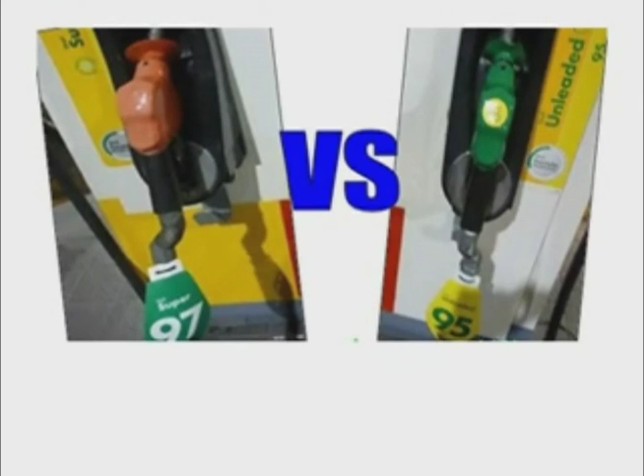In this video, we will discuss a common question that confuses a lot of consumers: octane number. When we go to the gas station, we typically find two different grades of fuel: RON 95 and RON 97.

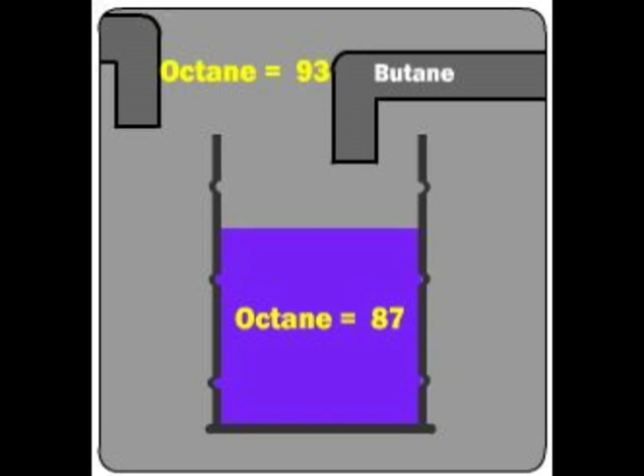RON stands for research octane number, used to measure the octane rating of a fuel. Those two different grades have different octane numbers. But the problem arises: what is octane number?

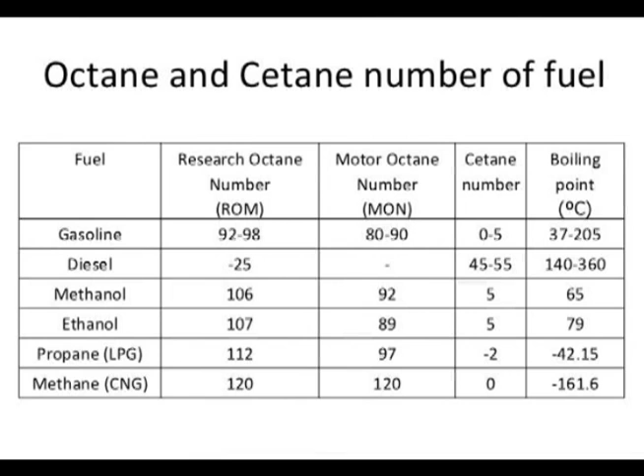The dictionary defines octane as a gasoline rating that indicates how much the fuel can be compressed before it spontaneously ignites. It is not an energy density rating, meaning a higher octane fuel will not make the fuel last longer than the minimum octane rated for your engine.

Many people think that using fuels with a higher octane number will give better engine performance. Actually, that is just not true.

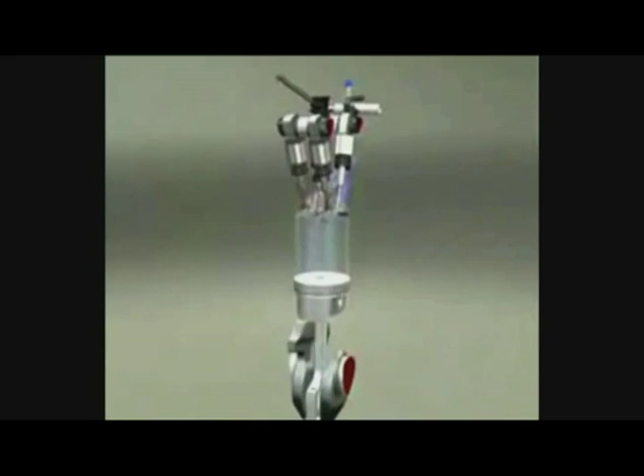Here is the engine combustion chamber of our cars. The internal combustion engine in all of our cars has a piston and cylinder. The piston moves up the cylinder and compresses the gasoline and air, which is then ignited by a spark plug.

If the gas ignites due to compression rather than by the spark plug, this causes a condition known as knocking. Knocking can damage an engine, so it is not something you want to have happening.

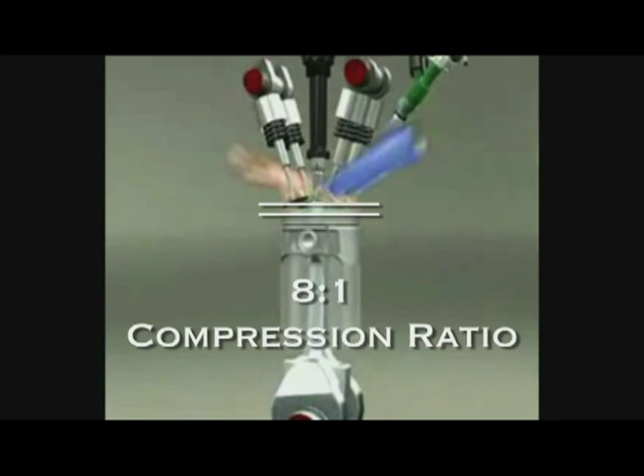The compression ratio of an engine is the amount of compression the piston makes each cycle. This determines the minimum octane rating the engine requires. One way to increase the horsepower of an engine of a given displacement is to increase its compression ratio.

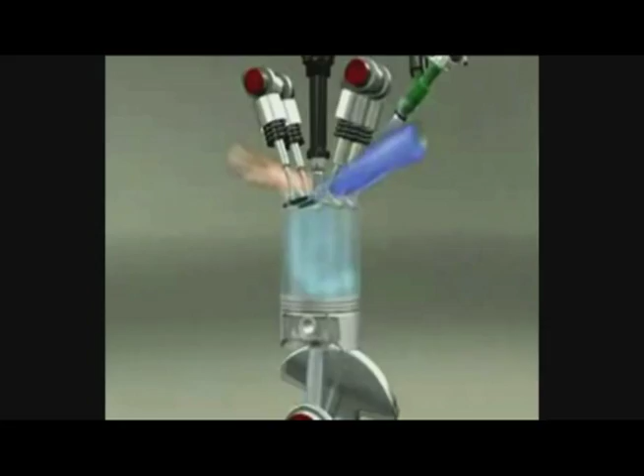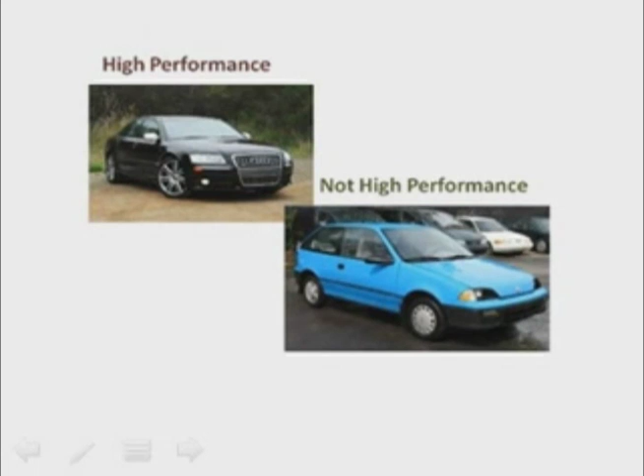So a high-performance engine, such as Audi, Volvo, etc., will have a higher compression ratio and require a higher octane fuel. The advantage of a high compression ratio is that it gives your engine a higher horsepower rating for a given engine weight, making the engine high performance. The disadvantage is that the gasoline for your engine costs more.

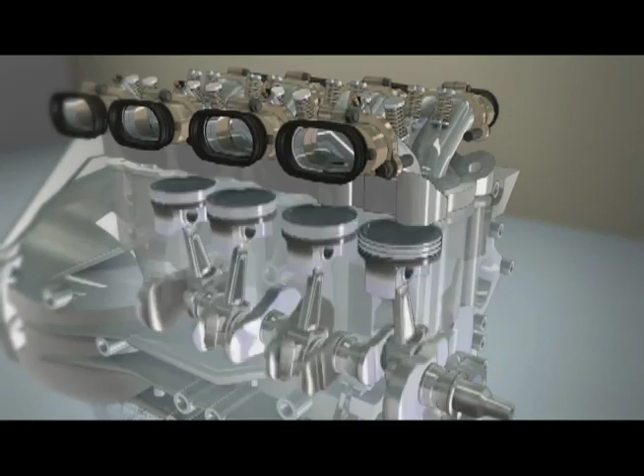How do gasoline additives make your engine work better? Let's tour a common vehicle engine to understand the role and importance of fuel additives. As quality gasoline enters the fuel tank, additives are already at work providing corrosion resistance and fuel stability needed by today's cars.

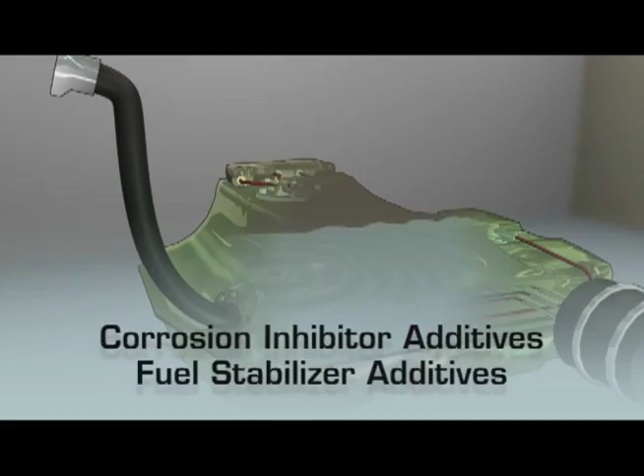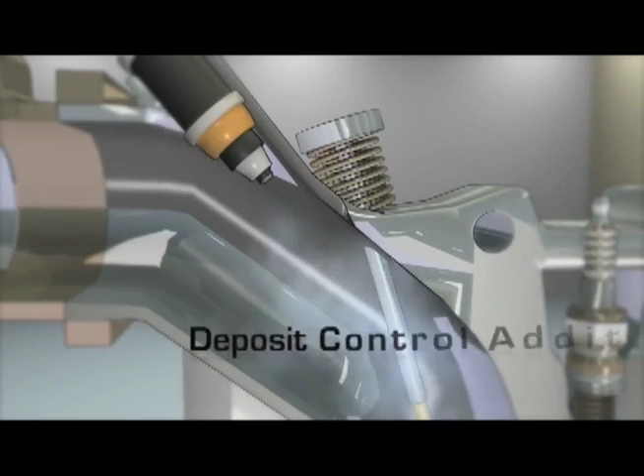Gas is then delivered to the engine through complex fuel injectors, which often sit just outside the combustion chamber. The fuel injectors must create a very fine mist of gasoline to vaporize effectively in preparation for combustion. Deposit control additives are critical to maintain ideal fuel spray patterns for effective combustion.

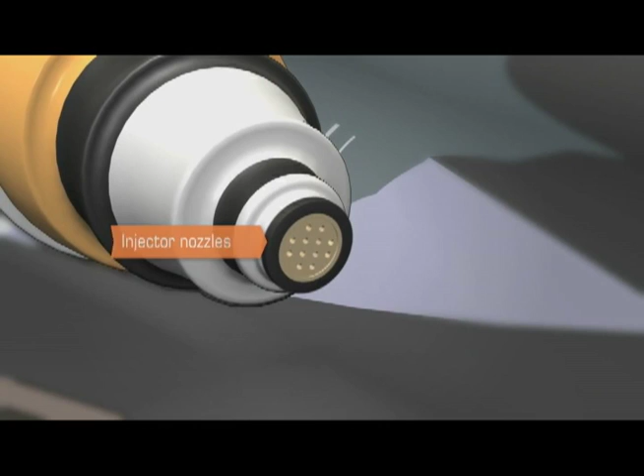These additives keep the injector nozzles and surfaces free of deposits. Without them, injectors can easily clog and result in inefficient fuel delivery.

During the engine's intake stroke, the intake valve opens and a mixture of gasoline vapor and air is drawn into the combustion chamber. During the compression stroke, the intake valve closes and the piston compresses the fuel.

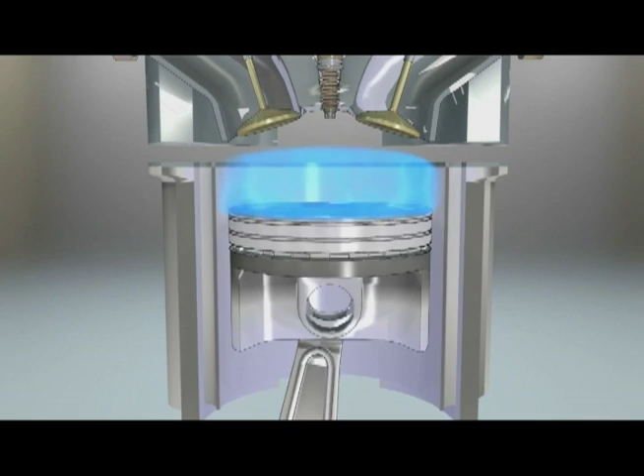As the piston approaches the top of the cylinder, the spark plug emits a spark and ignites the fuel, forcing the piston back down through its power stroke.

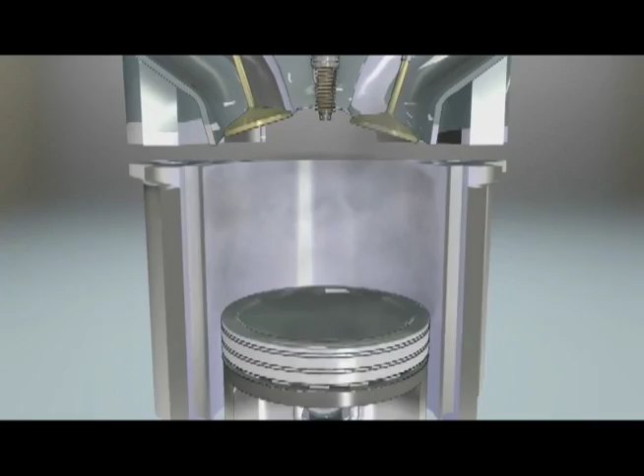Finally, when the piston hits the bottom of its cycle, it starts back up through its exhaust stroke. The exhaust valve opens and the exhaust gases head towards the tailpipe.

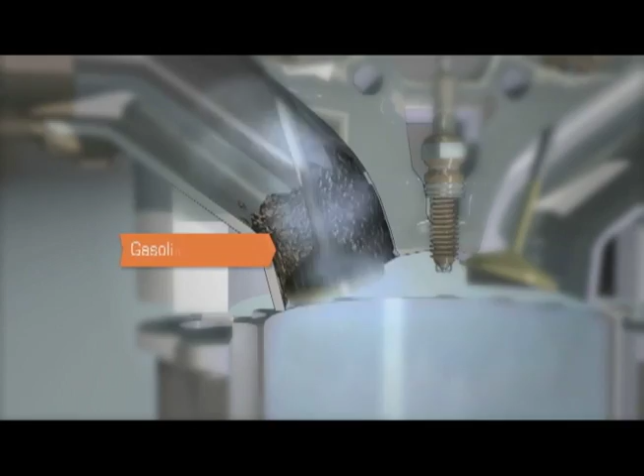This four-stroke process of intake, compression, power, and exhaust occurs very quickly, thousands of times per minute, and gasoline deposits can very easily build up on the intake valves.

With significant buildup, deposits can actually absorb fuel and prevent the engine from getting the fuel it needs to run efficiently. But in quality gasoline, deposit control additives remove and prevent deposits and keep valves and injectors operating like new.

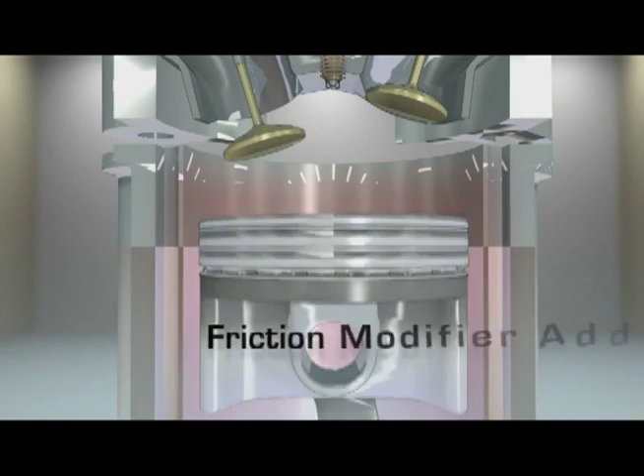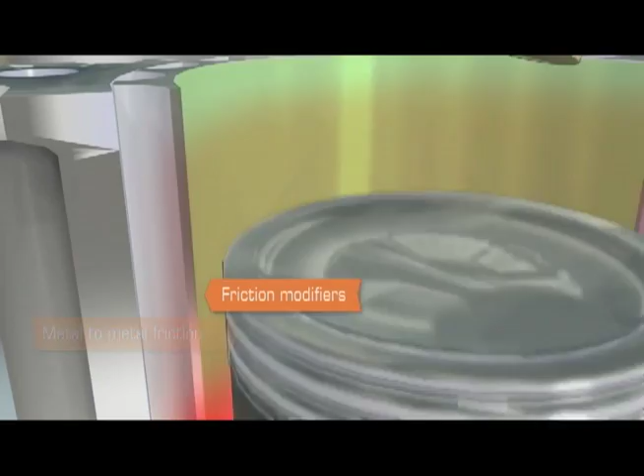Friction modifiers are yet another type of additive at work in an engine. They reduce the energy that can be lost during the four-stroke process through metal-to-metal friction of moving parts. Friction modifiers in gasoline can provide significant improvements to fuel economy as well as reduce engine wear.

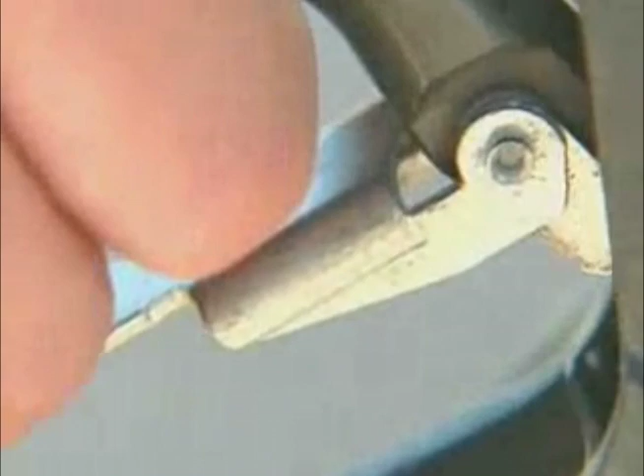In conclusion, it is best to use fuels that meet the octane requirement of the engine. Usually the octane rating for your engine can be obtained from inside the gas door or the user manual. Using a fuel that has a higher octane than needed is just a waste of money.